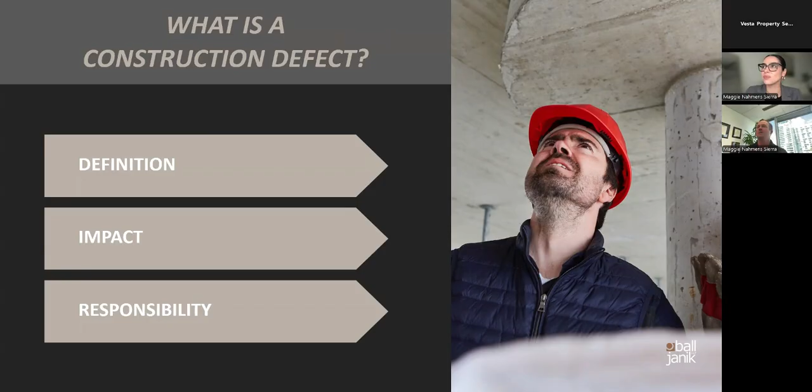The definition of a defect is a deficiency arising out of the design, specification, surveying, planning, supervision, observation of construction, or construction, repair, alteration, remodeling of real property. We'll get into that in a minute, but for the most part, in layman's terms, a defect is just a failure by someone along the way in the process to either design or construct the building, or a portion of the building, in the proper manner.

So you can have defective materials. A lot of people think of like the Chinese drywall, or polybutylene plumbing from when I first started doing this way back in the day. You can have defective materials or products or components, something that gets put into the building that is not going to work from the start.

You can also have a violation of applicable codes in effect at the time of construction, remodeling, or repair, which can give rise to a specific cause of action pursuant to Chapter 553. 553 is a law we have in Florida that says contractors have to follow the building code when building things, and the building code in Florida is very well defined and very well known. Basically, the contractor has to build in accordance with the plans and specifications that are the permitted set submitted to and approved by the building department.

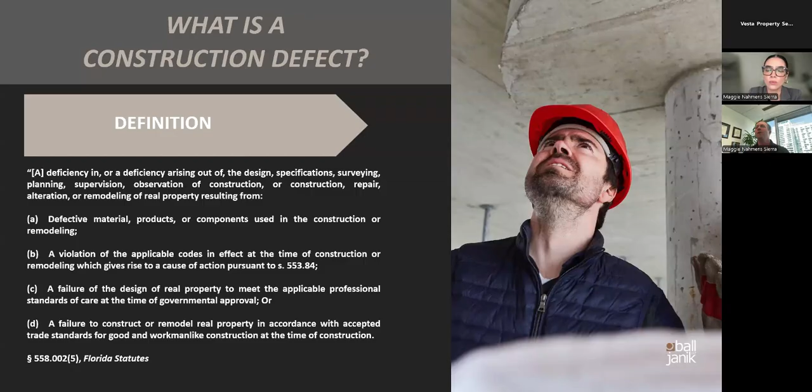So in Florida, to sue under Chapter 553, there has to be a material code violation. Most of our engineers and experts say there's no such thing as an immaterial code violation, meaning if it doesn't follow the building code, it's obviously a material violation. That's because they put it in the code for a reason.

But a material code violation is a violation that exists within a completed building structure or facility, which may reasonably result or has resulted in physical harm to a person or significant damage to the performance of a building or its systems. So that is in the building code. And what that means is there's some code violation that is impacting the performance of the building or has caused some sort of physical harm to a person.

So obviously, a building collapse would be an example of a physical harm that might be caused. But there can also be much, much less significant issues that can still be incredibly expensive to repair and can cause tons of damage.

For example, if you have an issue with the way the roof is integrated with the adjoining walls and it's directing water into the building and behind the building envelope, you can get significant rotting of wood framing. You can get all kinds of other issues associated with water being in places where it's not supposed to be.

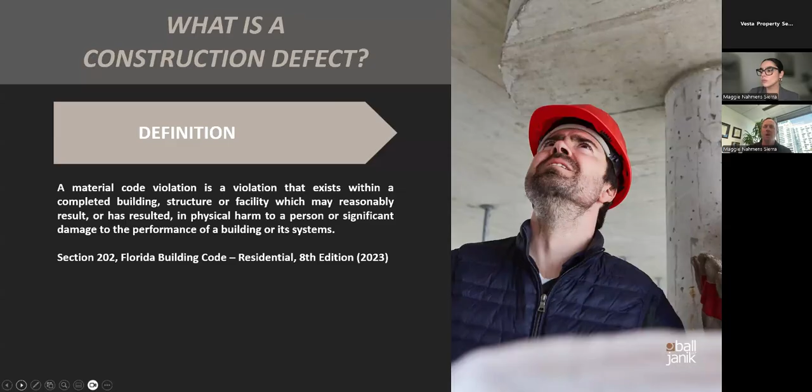So what is the impact? It can be property damage.

That could be, I'm trying to think of a good example, just straight property damage where it's not hitting the building. Like if you had a tile roof and the tiles weren't properly attached — I actually had a case where this happened — and a storm comes along, a summer storm, and starts blowing tiles off the roof, and they start landing on cars. Obviously you've got property damage there.

Some other things are getting damaged, but there can also be property damage where one scope of work damages another. So that would be like a leaking roof damaging the wood framing or the wood sheathing, or a leaking window causing damage to the interior portions of the unit around the window, et cetera.

So the other impacts can be premature deterioration of building systems. Obviously the framing and the stucco on the building are intended to be lifetime systems, right? You typically don't think of maintenance where like, oh, I've got to go change out the framing on my house, or I got to replace all my stucco because it's been on there for 10 years.

But what can happen is if water is getting behind stucco or in an area where it's not supposed to be, it can cause the stucco to crack. It can cause the stucco to delaminate, or it can cause it to even spall and completely fall off the building. So that's premature deterioration.

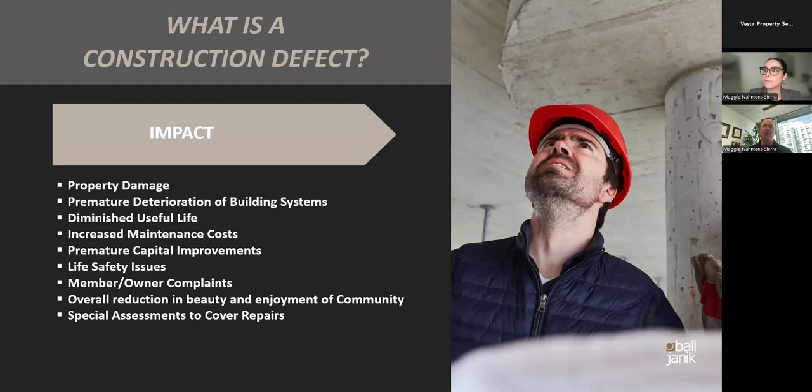Life safety issues, like balcony railings, are a big one we see. We've had more projects than you'd think over the years where balconies had to be completely closed to occupants because of life safety issues with railings, or water intrusion causing damage. In some cases, we've had entire buildings red tagged by the building department, which can be a major problem for the association and owners, leading to member complaints, reduced enjoyment of the community, and special assessments to cover repairs.

Next up is responsibility. Who are we representing when working on behalf of an association, and who is the association going to pursue? It can be anyone from the developer, the general contractor, or the individual qualifier who is the license holder for the contractor. There may be reasons to sue that person individually, which we assess on a case by case basis depending on their involvement.

It's important to remember that the general contractor and qualifier, when they pull a permit, are telling the building department they will make sure the building is built in accordance with the code and the approved plans and specifications submitted. They can't just shirk that responsibility by subbing all the work out to others. They're on the hook for whatever the finished product is.

Next, you're going to have architects, engineers, and surveyors, depending on the types of defects. There can be issues with the design, and the contractor can say, hey, I built it exactly how it was designed and it's not working - and the reason is because there's a design defect.

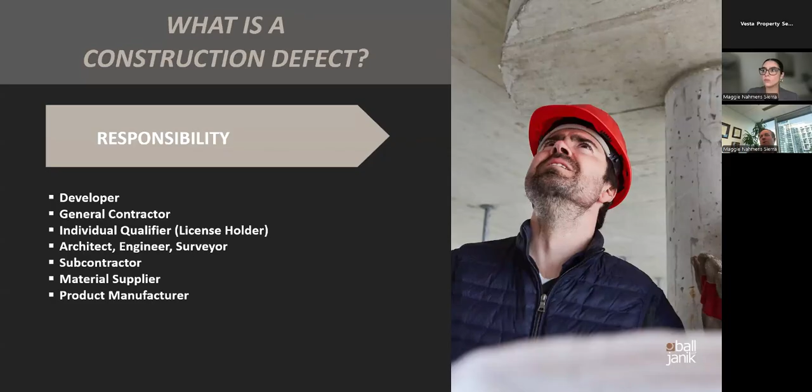So we're going to talk about latent versus patent construction defects. Patent just means you can see it with your own eyes - you don't have to do any testing, and you potentially don't have to be an engineer to recognize it. A patent defect is one that's open and obvious. If you see a massive crack in a wall, or your roof leaks every time it rains, that is probably a patent defect.

Now, you may not know why the crack is there - the reason why it is there may be latent. The reason the roof is leaking may be latent, but the knowledge of the issue itself is patent. For example, there's actually a Florida case that came out saying everyone knows a brand new roof is not supposed to leak all the time when it's raining.

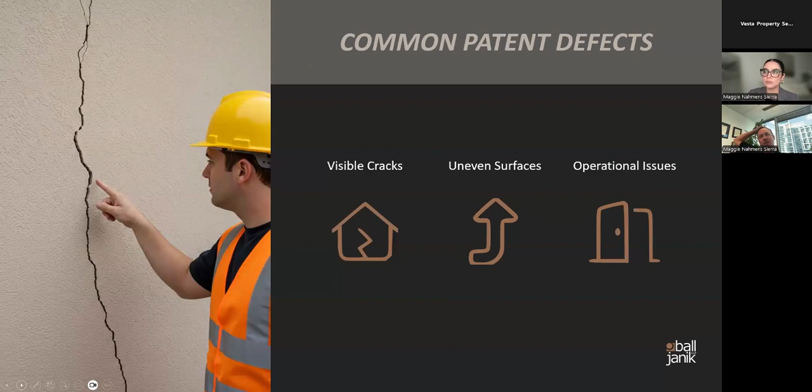So at a certain point, if you get a brand new roof and it's leaking, you're on notice that there's potentially a construction defect, and that defect is a patent defect, versus a latent defect, which is a defect you may not be able to recognize without doing some additional testing or at least getting a professional involved.

When you're looking at a building, you're essentially looking at the outside skin of the onion. You're only seeing a limited view of what could be going on with the building envelope or other components. There could be things you're not able to see without performing destructive testing or investigatory testing, where you open up and peel back layers to see how everything is performing.

Like the big crack we saw in the prior picture, that's probably patent, but a lot of times there will be very minor cracking that is indicative of issues with the stucco, or water getting trapped behind the stucco and trying to get out. That's typically considered a latent defect.

You can also have latent defects associated with your MEP systems—air conditioning, electrical, fire protection, plumbing. We see lots of HVAC issues in Florida over the years doing this. Glazing systems, that's windows and doors. Post tension systems, that's on mid to high rise condominium buildings, or pretty much always condominium buildings or any kind of tall building. A lot of times they are put together using post tension cables, and the balconies are supported by post tension cables and things like that.

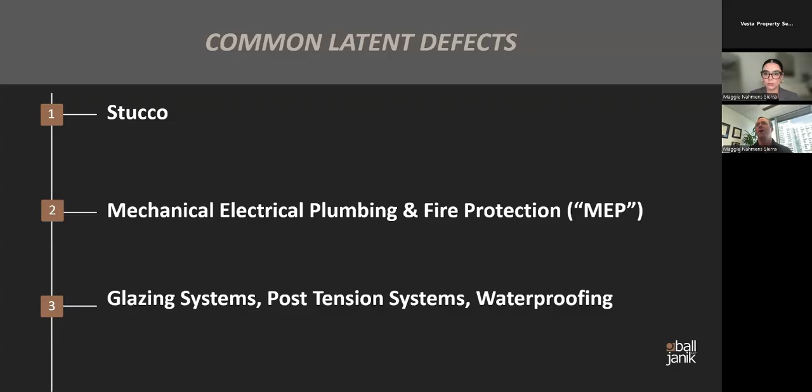Obviously those things get covered in concrete. The windows, when they get put in, you can't see how they're necessarily installed because they're surrounded with trim. Waterproofing of the building, beneath the stucco, beneath the balconies, you're not going to be able to see that unless you open it up. So those are all common latent defects.

The next slide will talk about common stucco defects you may notice in your communities. You can have stucco with insufficient thickness—there's a standard for how thick stucco needs to be, an ASTM standard, and a lot of local building codes now also address this issue because it was such a problem in Florida. If it's too thin, that's a problem because it will crack and flake off.

If it's too thick, that can be a problem because it can have more weight than whatever is supporting it, whether it's on a concrete block wall or on wood framing, you're going to have a metal mesh or lath behind the stucco that holds it on. So that can be an issue.

Other issues you can have with stucco include improper control joints. A lot of times builders will say, well, stucco is just concrete and all concrete cracks—everybody knows that, of course it cracks. And there is going to be some cracking with stucco and any kind of concrete because of expansion and contraction—it gets hot, gets cold, and the materials expand.

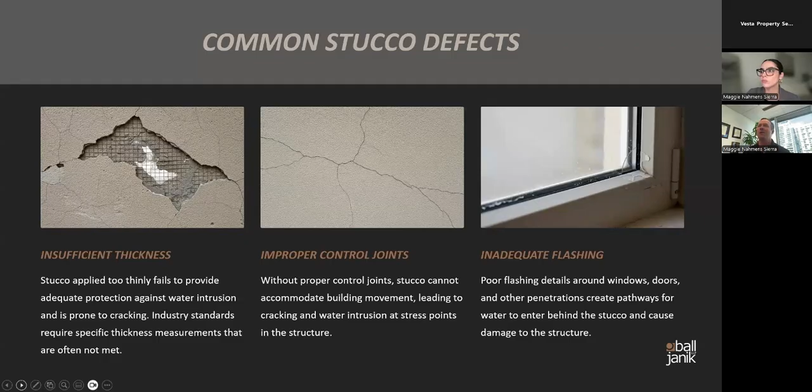And even if you don't have wood, if water is trapped behind the stucco, water always tries to find a way out. A lot of times the way it gets out is by causing the stucco to crack, and sometimes you'll see efflorescence, like salts building up on the outside of the stucco. So lots of things can go wrong with stucco, especially here in Florida where we have a lot of rain.

So here we're looking at some pictures where some stucco has been removed to show what is behind it. In this case, you can tell there's been some water intrusion at this location. And this other picture to the right, this is on a stucco over block or stucco over concrete, a bigger building, but you can see that the stucco is delaminating and cracking, not performing as it's supposed to. We can go to the next one.

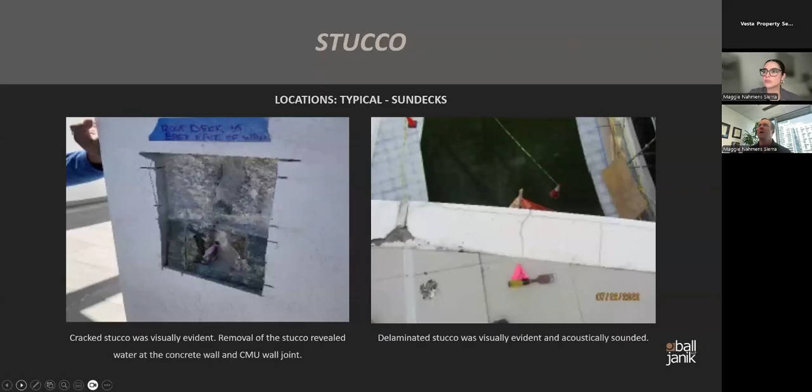This pool deck waterproofing issue is another issue that we see fairly often. This is going to be a lot of times again on a mid-rise or high-rise type situation.

It's not necessarily going to be a problem if you've got a community with a bunch of two-story townhomes and a community pool. But anytime you're creating a pool deck or a balcony deck above some other portion of the structure, you've got to do a really good job of waterproofing those things and integrating them with the building envelope. Otherwise, you can be setting yourselves up for failures of the waterproofing.

And structural issues. We've had pool decks that had to be shored from the garage below because of the amount of damage that had been done to the concrete adjacent to the pool. And then you can just get general deterioration of concrete and stuff around it as well.

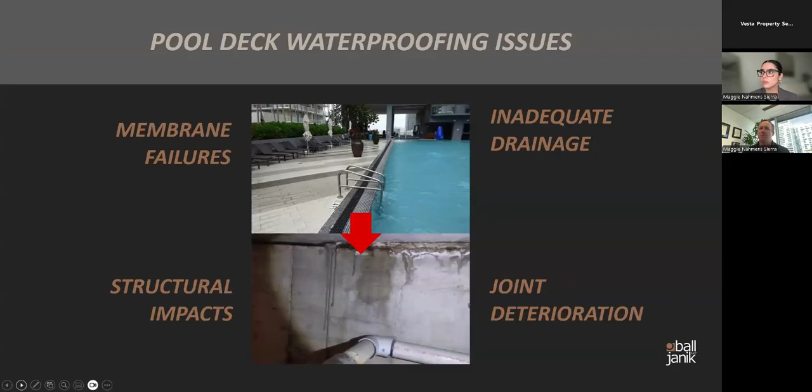Let's go to another picture to show you some of the pool deck issues. This is on the left, you can kind of see there's been some water damage there. And on the right, this is below the pool, so you're getting issues where the pool deck wasn't properly waterproofed.

Now you're getting water that's getting trapped into your garage. And over time, the amount of water can actually start to impact the structural integrity of the concrete and the block. So these are major issues to be on the lookout for if you are handling those types of buildings.

If you're not, really most of your defects are going to be typically in the building envelope, although we see a lot of site work issues too lately. But a lot of stucco, windows that leak, roofs that leak, evidence of water damage really anywhere on the envelope — that can be major problems.

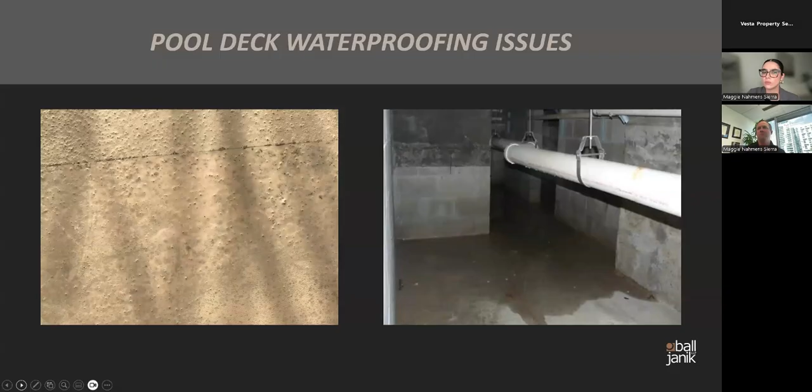The next thing is MEP issues. It looks like electrical boxes and things like that weren't properly coated. We see this a lot, not necessarily waterfront, but near the ocean, near the water, in mid and high rise condominium buildings. Obviously you're in a corrosive environment. There are code requirements that, depending on how close you are to the shore, and industry standards, require you to use certain types of materials. A lot of times those materials are significantly more expensive, so they don't use them.

I see I've got a question, so I'll come back to that one in just a second. But you can have pretty significant issues with just them using the wrong materials.

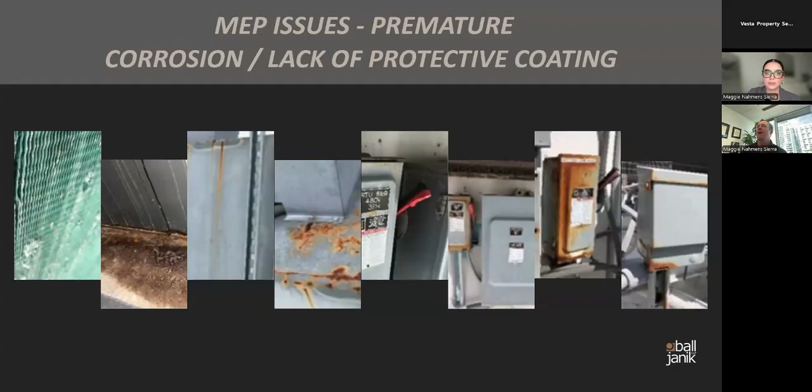The other thing that you will see a lot is the HVAC system in your buildings and homes should have positive pressurization, meaning that when your AC runs, you are positive to the outside, not sucking outside air into your home. Why is that so important in Florida? Well, obviously you don't want to be sucking hot, humid air into your home, into your attic and into your walls, because what's going to happen at night when that hot, humid air cools — it's going to condensate, and then you're basically getting water in all kinds of places where it shouldn't be.

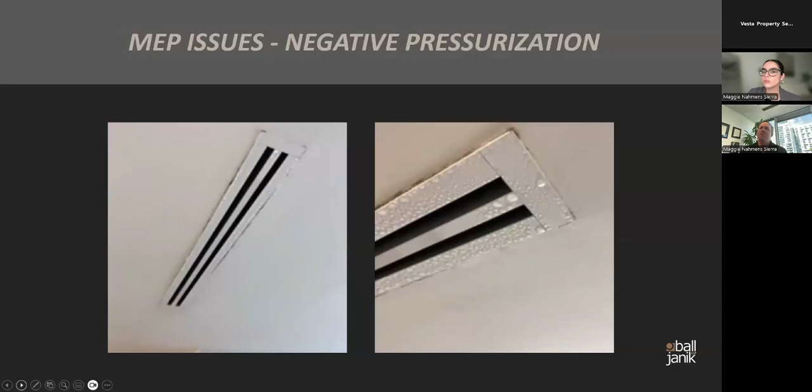So that's another kind of typical MEP issue that we see, along with HVAC systems, that are sometimes more in the townhome context than in the tower context.

We see a lot of HVAC systems that are actually oversized or not properly installed, and that can cause problems too, because if your air conditioning doesn't run enough or for long enough, it doesn't take the moisture out of the air, and you can have mold and humidity issues on the inside. We also see a lot in bigger buildings issues with cooling tower systems, with corrosion from materials that weren't properly specified, or they went with a material that they shouldn't have for that particular location.

So I'm going to jump back, I'm sorry I didn't see the question earlier. Someone said we're beginning a painting process, have stucco cracks that painter will caulk and seal before painting. What's your opinion on gutter responsibility to reduce cracking and water intrusion? Builder put gutters on front and back, but not sides.

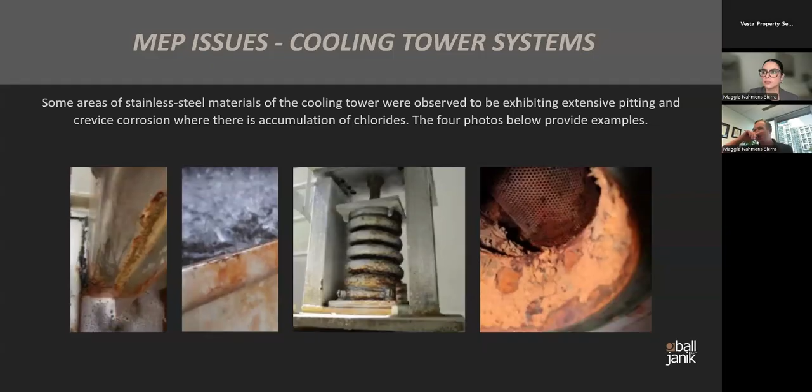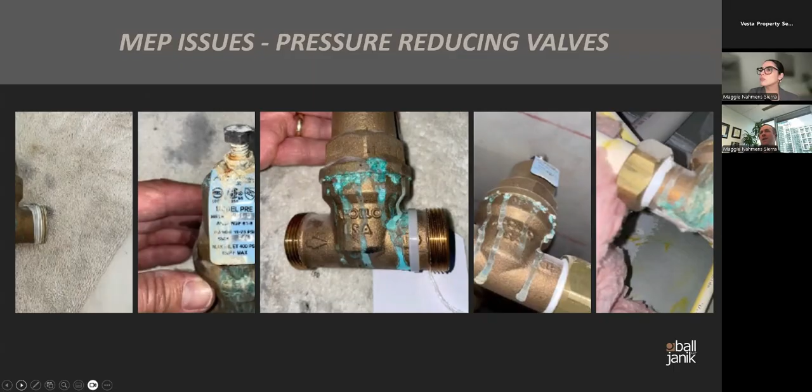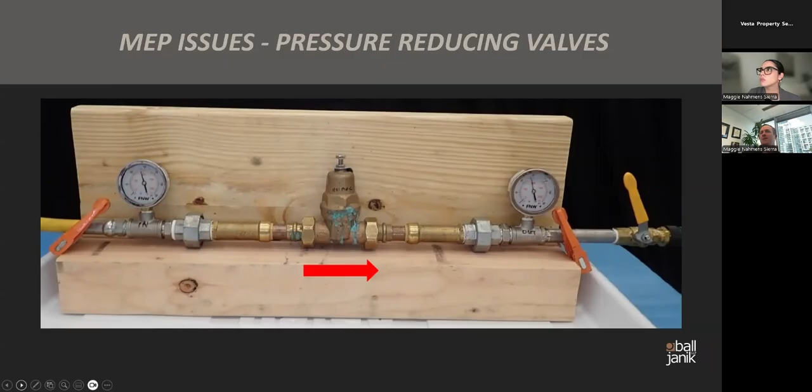All right, let's go to the next slide. These are just all different types of MEP issues. These are pressure reducing valves that are failing, and you can tell by the corrosion going on there. The next slide shows it's not actually doing the pressure reducing it's supposed to be doing, probably because the valve is failing. You can also have different missing fittings.

More common than that is what we see next, which is shower pan issues in big high-rise and mid-rise condominium buildings, but also in typical single-family homes and associations too. I don't know how many of you have gone to redo your shower only to find out, once you start taking the tile off, that there's a soft spot because they didn't put the shower pan in correctly. In a condominium building, they are actually responsible for that portion of the building, and if you multiply that out times hundreds of units, it can be a significant issue in terms of the cost to repair. It can also cause significant damage to the building, depending on the materials around the shower pan, or just an annoyance where every time your upstairs neighbor takes a shower, you're getting a wet spot on your roof, which will eventually become a major problem.

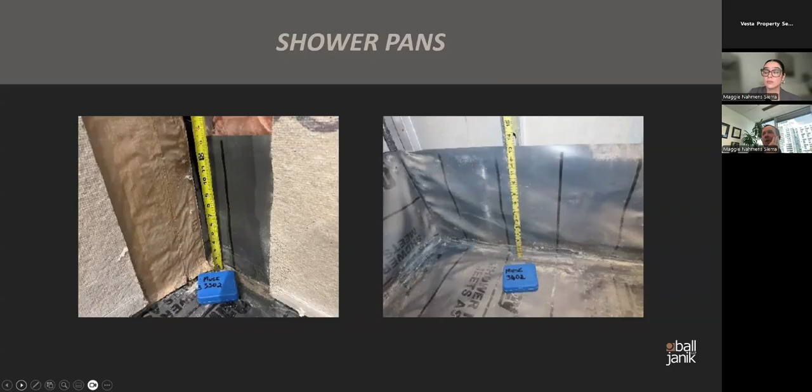We can go to the next slide.

This is just showing, you can see that there's been some water deterioration beneath where some of the tile's been removed, and that there's moisture there that should not be there.

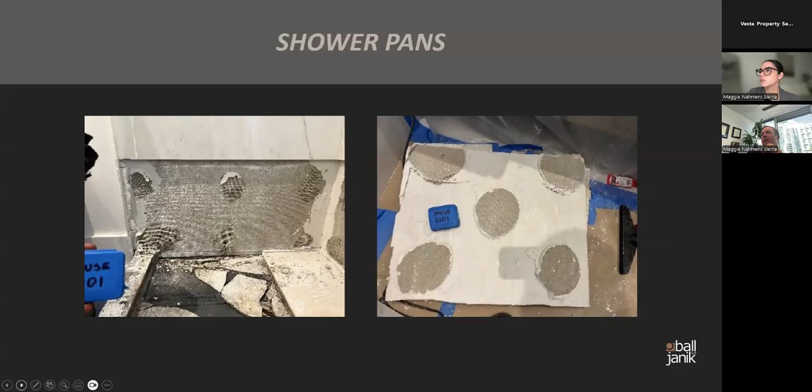And then the next slide, these are all from a high rise in Miami, where they had significant issues with the shower pan, significant leaking. You can see there's even cracking of the substrate there.

Again, anytime water gets anywhere, it's going to cause damage. That's why you have to manage where it goes and how it gets out of the building, in terms of all aspects of the envelope, because water over time will destroy wood and can seriously damage concrete and other materials. A lot of times people think, well, it's concrete, it's waterproof. That's not necessarily the case. Concrete can be weakened over time by enough water.

In the next slide, you can see water was detected under the shower pan. There's a little pink paper there - that's litmus paper that our experts use to look for water where it's not supposed to be. In this case, they're doing it with the shower pan.

A lot of times you'll see them doing this when they do window testing on buildings. They'll have one person on the outside spraying the window with a nozzle at a certain pressure specified by the industry for window testing. So it's not like they're pressure washing the windows. It's a nozzle designed to put the right amount of pressure that the window should be able to stand up against. You'll see them standing inside with this little pink paper at different portions around the window.

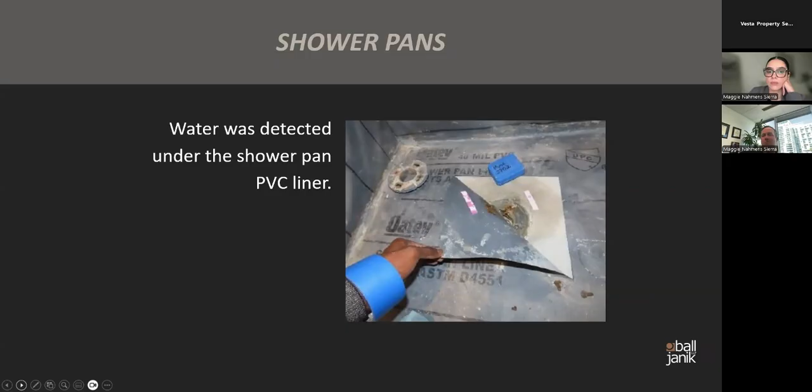So here we go, now we're getting into windows. Windows are a significant issue, whatever the construction. These pictures deal with some high-rise construction, but even in your two-story standard townhomes like we mostly have around Orlando, the windows tend to have significant issues with the way they're installed.

They're using builder grade windows, which aren't necessarily the best, but if put in correctly, they shouldn't leak. There's a whole system around that window that includes flashing, different layers of sealants. This is showing a different type of window where you've got a secondary sealant, a primary sealant, and then grout. But the installation of the sealant around the windows and the integration of the windows with the flashing is a huge problem that we see on almost every one of our projects.

The people installing the components adjacent to the windows and the people installing the windows are not getting on the same page and getting the windows properly integrated with other portions of the building envelope. When you're dealing with a building envelope, if you have waterproofing that's reverse lapped, if you're missing sealants, if you don't leave room for the sealants around the windows - we see that very commonly. They'll run the stucco right up to the edge of the window, and there's no room to put a sealant, so they just don't put one there.

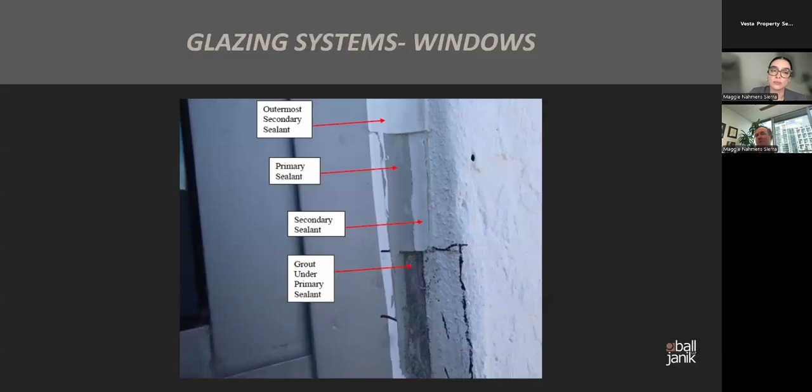So sometimes haste makes waste, that old saying. Doing things too fast and not making sure they're done right can cause a lot of problems. To some extent, the contractors honestly don't care that much to make sure they're doing a great job because they have insurance and their subcontractors have insurance. So they're not ultimately thinking they're going to be financially responsible for whatever happens down the road. What they care about is making money now.

All right, let's go to the glazing systems, when you're looking at windows.

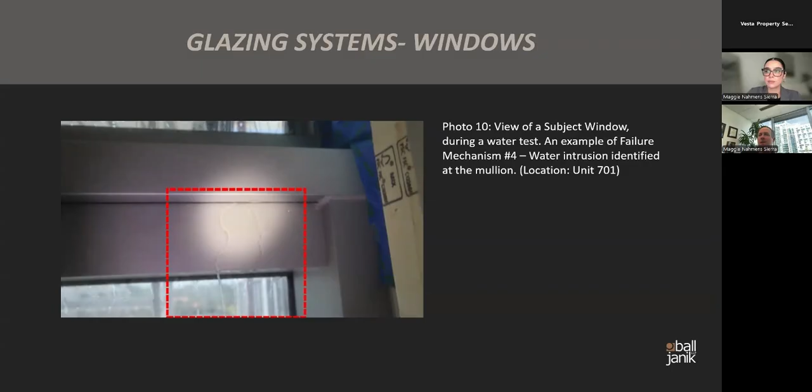There's just water pouring into the interior portion of the building. The next slide is really just going to show you how we do that testing, but on a sliding glass door. You can see we build like a rack with clear plastic, and they use a machine to create the design pressures. Again, a lot of issues with sliding glass doors and balconies, and it's not typically the product, but typically the installation of the product.

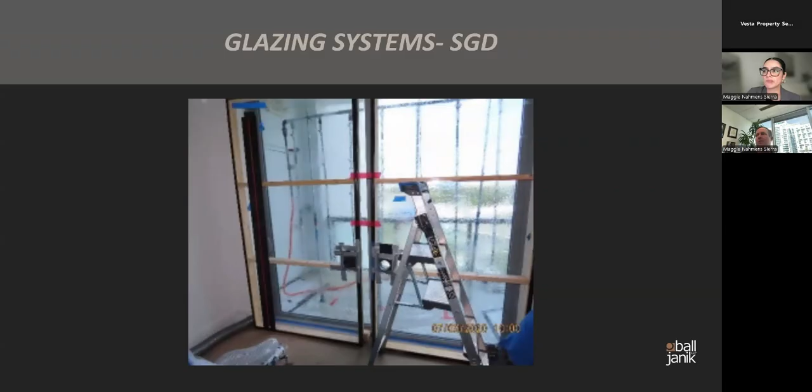I had a big apartment case, actually up in Tennessee, but we've had it in Florida too, where the balconies all got red tagged because when our engineer went up there to start testing, there was ponded water on the balconies, and the balcony railings actually felt somewhat loose—like you could move them with your hand. Obviously if you ever see that, that's a terrible sign. When we opened up those balconies, the wood was completely rotten. They had to shore up all of the balconies with emergency shoring and basically lock all the residents off from their balconies so they couldn't access them until they made the repairs.

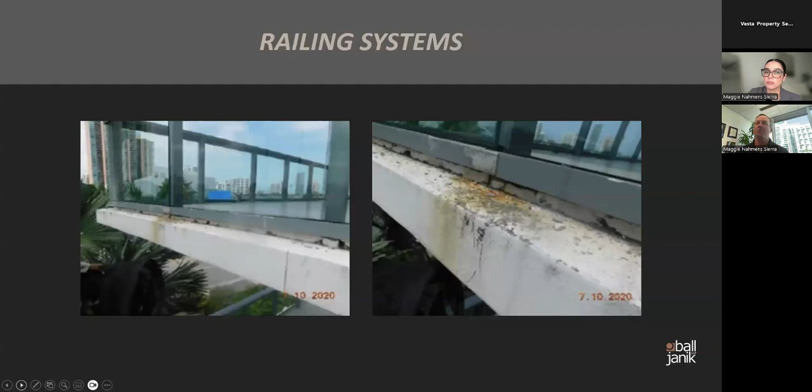So railing systems can also be a contributor to water intrusion, because if they pierce the waterproofing of the balcony and don't reseal it correctly, that can also cause major problems. Post tension cables.

This is one you're going to see typically on mid and high rise buildings. I've seen them on buildings as low as maybe 5 or 6 stories, but your average 2-story townhome's not going to have a post tension system. Post tension cables are basically an engineering way of supporting portions of the building. They typically run through the concrete. They have to be installed correctly or they can snap, and they also have to be waterproofed.

They actually grease them as well, or they can snap. And if they start to fail, you have a major structural issue - balconies can fall off the buildings that are being supported, or whatever is being supported by the post tension cable can fall off. They typically run through the slab, so they may go from one side of the building to the other through the slab.

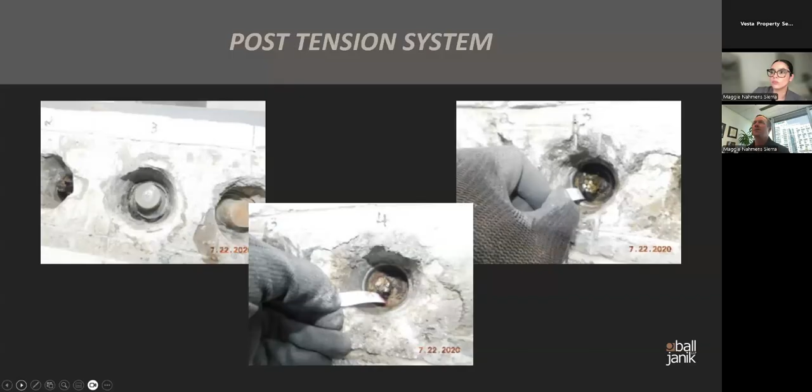And unless you have an engineer who knows how to do testing, you're not going to be able to know you have a problem with them until that problem starts to come alive. So next we'll do roof defects, and I am way behind, so I'm gonna speed up.

We've talked about roofs a lot. With roofs, whatever kind of roof you have - if you have water standing on a flat roof, that's a bad sign. If you have any kind of leaks, that's a bad sign. A roof that's properly installed is not going to have repetitive leaks. So with that, I think we've kind of talked about that.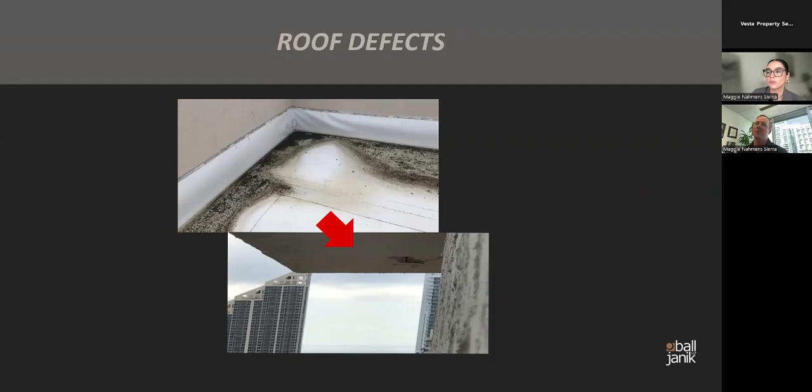Next would be kind of the blame game - who's responsible? We talked about this to some extent already. Is it the developer? Is it the design team? Is it the contractors? Is it the inspectors? Well, everybody's going to point to everyone else.

The contractor is going to blame the design. The designers are going to blame the contractors. The contractors are going to blame the subcontractors. The subcontractors are going to say the general contractor told me to do it that way. And that's every one of our cases - they're all trying to blame others.

People will also blame the association and say, well, you guys didn't maintain it properly, even though you may have a building that's 3, 4, 5 years old, having significant issues, isn't due for any kind of major maintenance. They will still try to blame it on the association. It's, hey, it's everybody's fault, but mine.

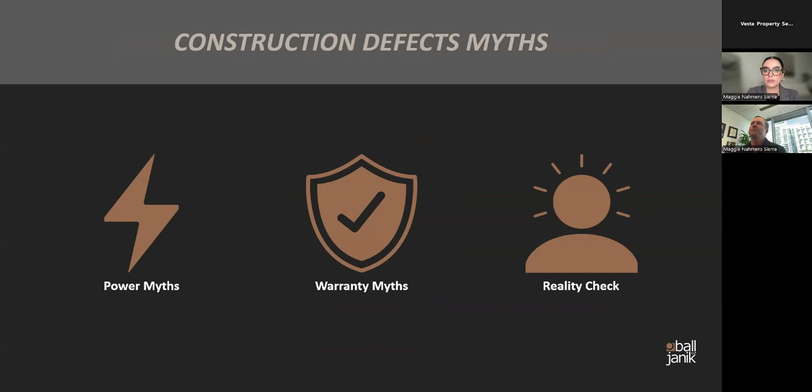So, construction defect myths is the next slide. Basically, I'm just going to go to the next slide, which is repair and renovations as defects. Let's talk about that. So you can also have not just new construction that goes bad - obviously, you can have repairs and renovations that go bad.

With all of the recent legislation when it comes to condos, a lot of people are inspecting their buildings. There's a ton of construction going on in terms of repairing and rehabbing older buildings. We also get a lot of cases where, say, a townhome will have reserved for 20 years, it's time to replace all their roofs. They go and get all brand new roofs, everybody's super excited about it, and they all leak. So there can also be defects in repair and renovation projects, and we're able to help with those as well. We see that a lot.

We also - sort of other areas when you're doing repair and renovations for your associations - it's critical, really critical, that you do a good job and help guide them in terms of contractor selection. I know that you guys are going to be getting 3 bids, multiple bids, and hopefully working with an owner's rep or an engineer on a major project. But you want to make sure you're using companies that are reputable, companies that have the proper insurance, companies that have the proper contracts - have your general counsel look at those.

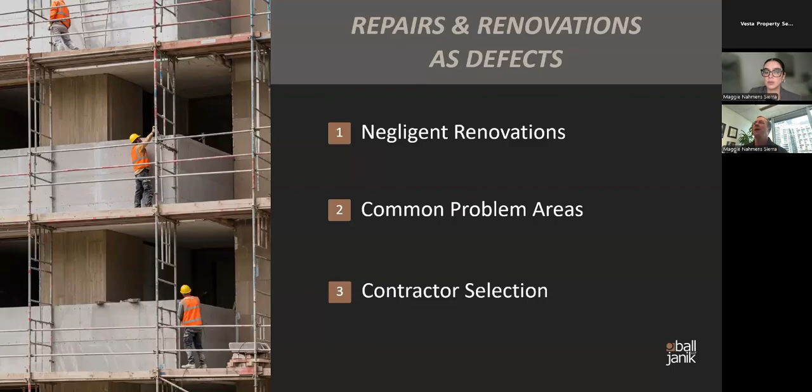For condos, this is significant. Their condo statutes have all kinds of statutory warranties, and we would sue for breach of warranty in those cases, but that does not apply to your typical Chapter 720 association.

Turnover. When is turnover? Condominium associations - turnover is a big deal for condos because they keep changing the statute of limitations and statute of repose. And it's a big deal for 718 and 720 for a whole bunch of reasons, right? Like it's the moment where the owners actually get to take control of their own destiny.